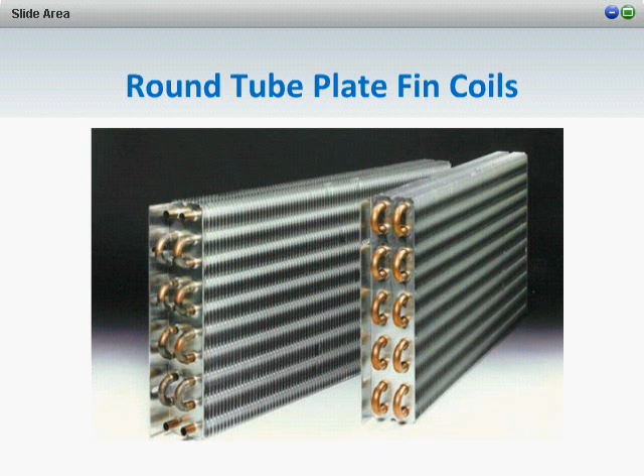The type of coils we're going to talk about today are round copper tube plate fin coils, used in a number of applications covering residential, commercial, and industrial settings. These coils can be condensers, evaporators, water heating coils, and a number of other heat exchanger uses. Round tube plate fin coils have been around for over 100 years, and there are good reasons why they are still in use today. But as we're going to see, they are being successfully modified to fit modern demands.

Many of us are already familiar with the increasing requirements for energy efficiency and the push to use refrigerants that are less damaging to our atmosphere. In an effort to lower costs, many design engineers are also under demands for smaller, more compact systems that save on materials and refrigerants. So over the next 60 minutes, we're going to discuss these demands for efficiency and cost savings, and look at how smaller diameter MicroGroove copper tubing can help meet these demands with minimal investment or change to our well-established manufacturing practices.

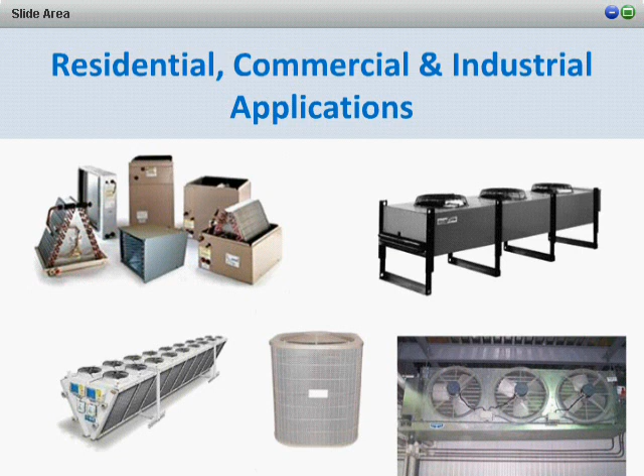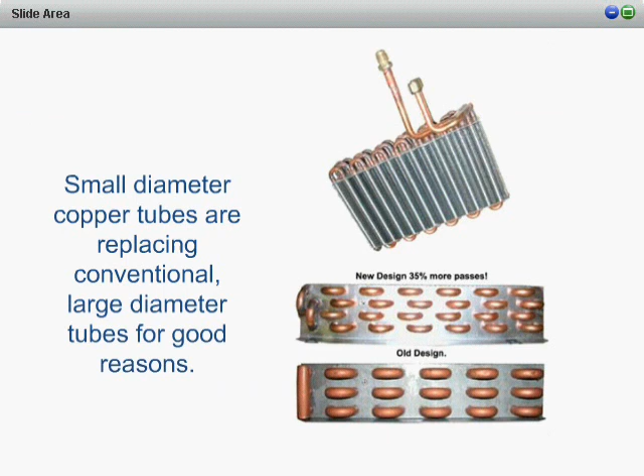Specifically, we're going to show how reducing the diameter of copper tubes can improve heat transfer, resulting in more energy efficient, smaller, and lighter coils, bringing about all of these benefits to the manufacturers and distributors of air conditioning and refrigeration systems.

Keep in mind that each of these benefits is not only associated with meeting energy and refrigerant regulations, but each benefit also means cost reductions or cost efficiencies that help all of us in this increasingly competitive market.

The standard round tube plate fin coil has been in use for over 100 years. In the 1980s, tubes with internal grooves and enhancements were developed, and because these internal modifications were found to have such a big impact on efficiency, they quickly became common in the market. The name MicroGroove today refers to these internal enhancements. But MicroGroove is a newer name, and it also means smaller diameter tubes.

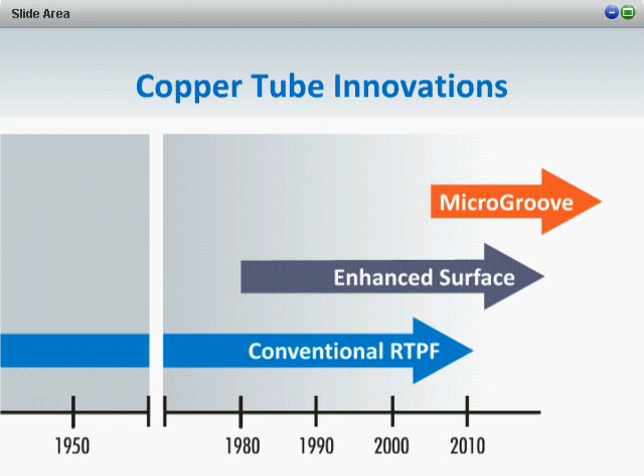Over the past 10 years, we have seen a trend toward internally enhanced, smaller diameter tubes, and on this timeline we noted that coils with MicroGroove tubes have been in commercial use since about 2005. And we know that all of these OEM manufacturers are currently producing systems with small diameter MicroGroove tubes.

There are a number of factors behind the move towards small diameter tubes, and they range from government mandates on energy efficiency, such as increased SEER ratings, to the phasing out of R22 refrigerant and higher pressures that are associated with replacements for R22. R22 replacements include 410A, which is currently being used in residential air conditioning systems. The coefficient of performance, or the COP, is another rating that design engineers are paying more attention to, and the drive to increase COPs is yet another factor behind trends towards smaller diameter tubes.

About 20 years ago, government regulations became a larger factor in the design of air conditioning and refrigeration equipment when the Montreal Protocol took effect, and that happened in January of 1989. Since then, that's undergone 7 revisions. The Montreal Protocol mandated a phase-out plan for CFCs, which are chlorofluorocarbon refrigerants, and they mandated that phase-out by 1995.

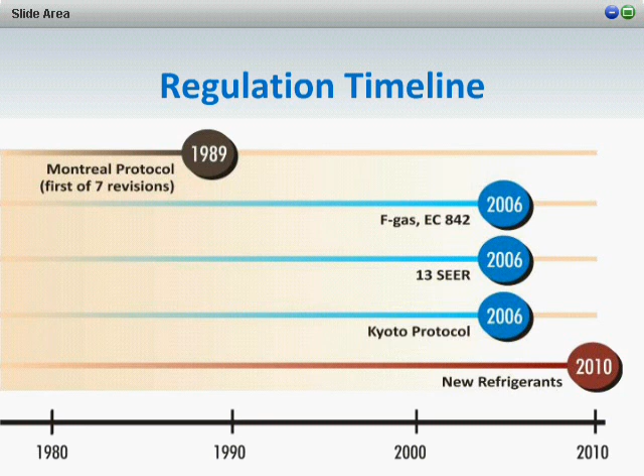The Kyoto protocol was adopted in December of 1997, and that went into effect in 2005. And the Kyoto protocol adds to the phase-out of CFC covered by the Montreal Protocol, and it focuses on greenhouse gases and HFCs. To quickly summarize this slide, government mandates that are related to energy efficiency and refrigerant use have pushed air conditioning and refrigeration manufacturers toward new coil designs that have to be more efficient, and they have to handle higher pressures.

Before we get into the technology of refrigeration and air conditioning coils and the technical reasons behind the trend to smaller diameter tubes, we want to emphasize just how complicated this subject is. We have refrigerant that's moving through coils, and as it does, the refrigerant changes phase from vapor to liquid, or vice versa. In the process, we have heat being transferred from the refrigerant through the tubes to the fins and ultimately into the air. And finally, we have the air that's moving across the fins and the heat that's being dissipated into that air. In all of these segments, we have dynamic processes occurring.

So the math behind the design of a coil can be quite lengthy and complicated. So for the purposes of this discussion, we're going to concentrate on technical concepts, and we'll use images to make our points. We plan to avoid any heavy math today, but we could go into that level of detail in a separate meeting where we would have sufficient time to do so.

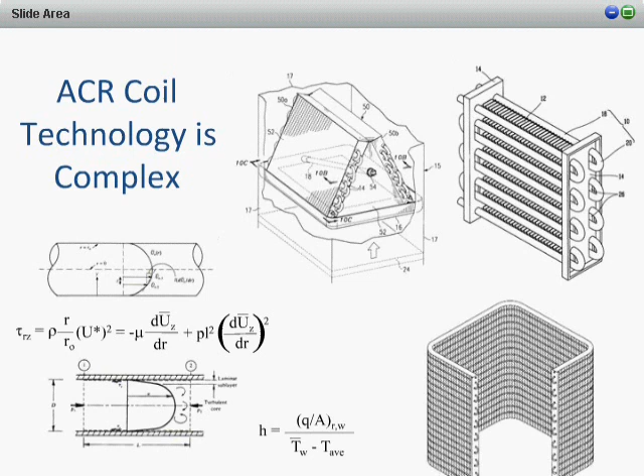So let's review the path that heat takes and the mechanisms involved as it moves from the refrigerant inside of a tube, through the tube wall, into the fins, and finally into the air.

The heat that has been transferred into the fins is eventually transferred into the air by convection. So we see areas where both convection and conduction are the mechanisms at work transferring heat.

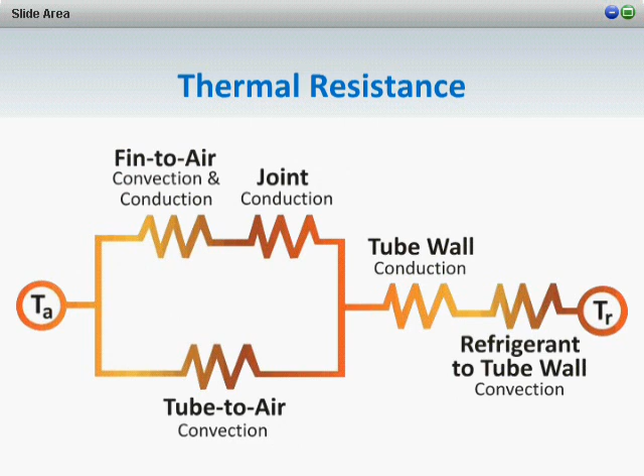Now let's take a close look at exactly what happens to the refrigerant flowing through the tubes, because that's where all of the heat transfer begins.

Whenever fluid moves through a tube, the fluid closest to the tube wall behaves differently than the fluid in the center. The fluid next to the tube wall sets up a boundary layer where heat transfer becomes more difficult. This applies to the hydraulic motion of fluid as well as the way heat moves from the center of the tube to the tube wall.

So heat transfer engineers refer to both hydraulic and thermal boundary layers. To simplify, the fluid closest to the tube tends to move slower than the fluid in the center. Even in turbulent flow, a laminar sublayer forms, and heat moves slower through these boundary layers than it does in the fast-moving fluid toward the center of the tube.

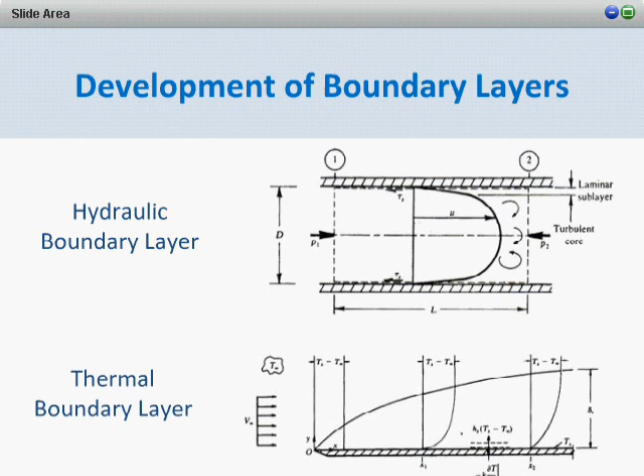Boundary layers act as an insulator, and they interfere with the heat transfer that we want. The internal enhancements in MicroGroove tubes—the grooves and proprietary patterns that tube manufacturers put on the inside tube wall—reduce this boundary layer and increase heat transfer through the tube wall.

Here we can see the boundary layer in a smooth tube develop, and it does not dissipate or go away. But in a tube with MicroGroove enhancements, you can see that the boundary layer begins to develop, but it breaks down as it moves over the grooves.

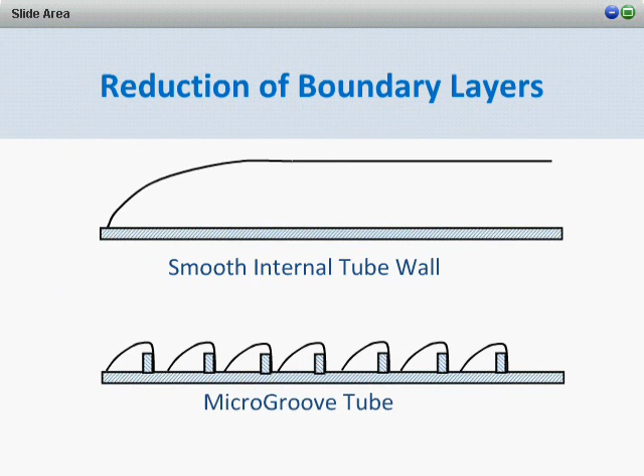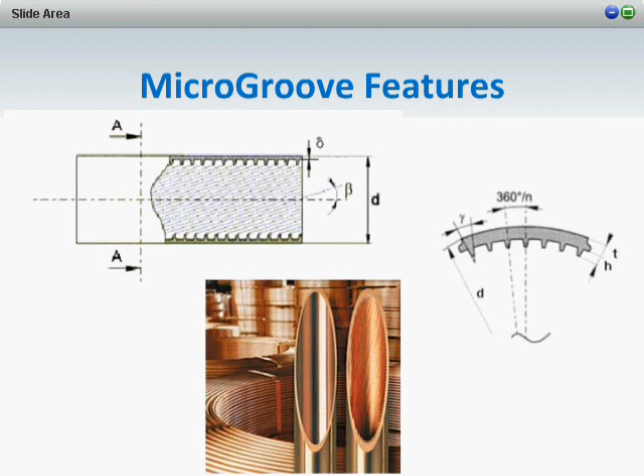The exact configuration of internal grooves and patterns is based on a long history of technical development and design, and it's backed up by both experimental and field performance data. The data clearly shows significant advantages to MicroGroove tubes.

The additional mixing of the refrigerant that occurs inside the tube because of these grooves increases the amount of refrigerant that comes in contact with the tube wall. The positive effect on heat transfer from these internal enhancements has been known for a long time, and it's been applied commercially for over 20 years.

And when combined with small diameter tubes, we have even more advantages that we want to look closer at. But before we do, let's look for just a minute at how air flows through a round tube coil.

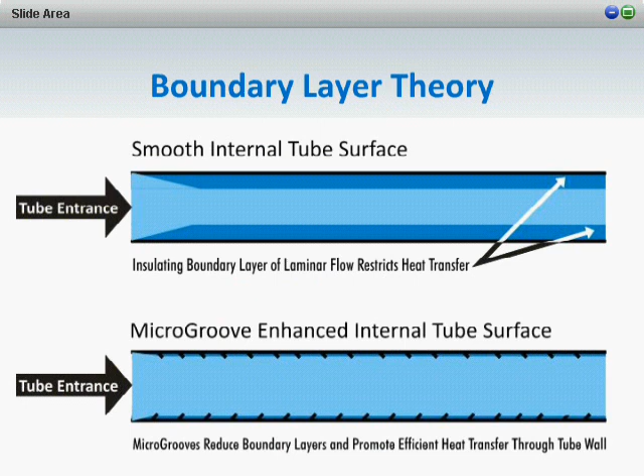Air must flow around the tubes as it passes through a coil, and as it does, the airstream is broken up and heat is transferred into the air. The number of tubes and their location will have an impact on the air pressure that is lost going through the coil.

Air forms the same type of boundary layers as refrigerant does, and in many respects it can be dealt with the same as any fluid. Just as we saw with microgrooves inside the tubes, outside, the tubes break up any boundary layers that the air tends to form as it flows through the coil.

The more tubes we use, the more we break up the boundary layer on the air side, and more heat transfer will result. But in many cases, more tubes means a higher airside pressure drop. So there's a balance at some point where a coil uses an optimal amount of air to achieve the heat transfer that the system requires.

Remember also that heat is being dissipated by the fins, and the fins have slots or louvers, again, to break up boundary layers and improve heat transfer.

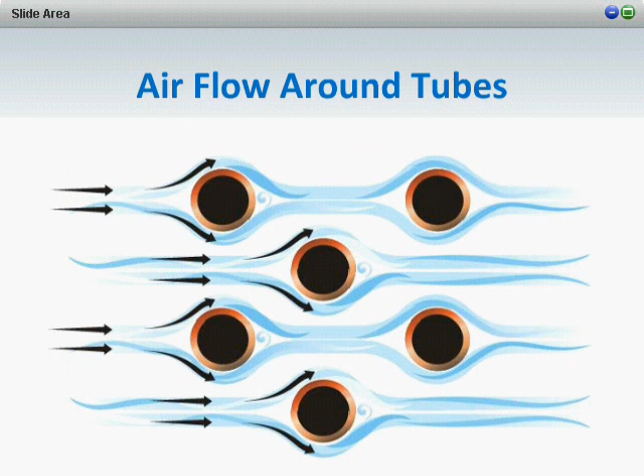Now let's discuss the geometry related to a reduction of tube diameter. And while we do, keep in mind the fluid dynamics that we just looked at and the advantages of microgrooves.

When we compare tubes of different diameters, the first thing we might notice is that it will take several smaller diameter tubes to equal the surface area of a larger diameter tube. At first glance we might think this is a disadvantage, but we actually have some important benefits here, a big one being an increase in the surface area to volume ratio, which equates to more heat transfer.

With this increase in heat transfer, we don't need to match the volume or surface area of the larger tube to get the same amount of cooling.

Another benefit we haven't mentioned yet is that in a smaller diameter tube, we can hold the same pressure as a larger diameter tube, but we can do it with thinner walls. So when we reduce tube diameters, we can actually reduce the weight of the materials being used, and that in turn reduces costs.

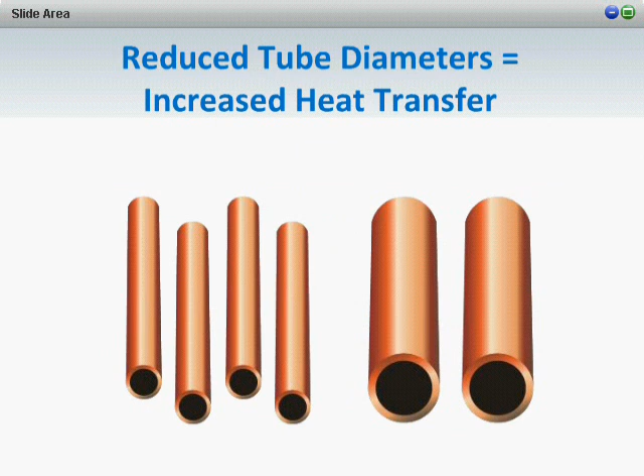As we continue to reduce tube diameters, we continue to gain surface area in relation to the amount of refrigerant that we have in the tube, and we can continue to reduce tube wall thicknesses while still meeting the same pressure criteria as the larger tubes.

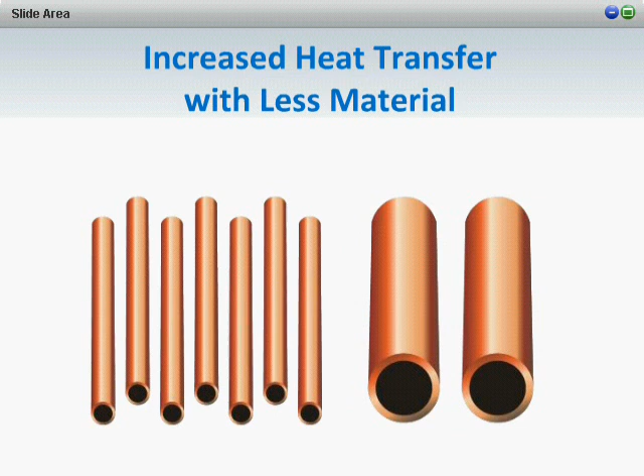Or, looking at it from another angle, we can handle higher pressures in a smaller diameter tube with the same tube wall thickness. The bottom line is that we can do a whole lot more with considerably less material.

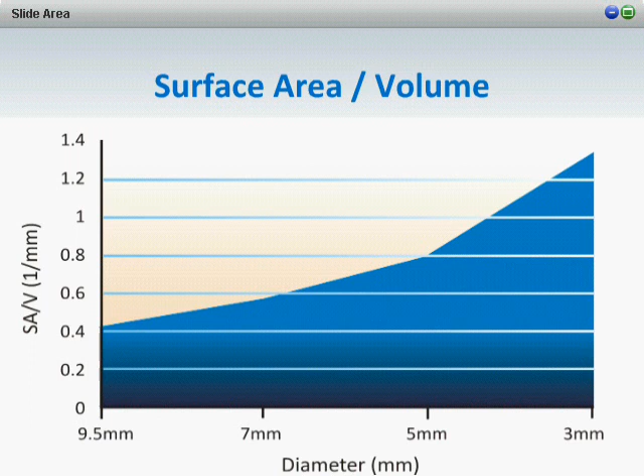Now we want to start talking about what happens to the entire coil when we substitute smaller diameter tubes. For the person designing coils, there are a number of factors to consider, and all of these will impact things buyers care about, such as how big the coils are, how much energy they use, and how much they cost. There are options when designing coils, and we want to look closer at these options to see the effects on performance.

So let's adjust these parameters: first, the total length of the tubes; second, the amount of surface area; and third, the volume of refrigerant.

The effects we're interested in when these parameters change are: number one, the overall performance of the coil as measured by the amount of heat transferred; number two, the weight of the coil, because that correlates directly with material cost; and number three, the heat transfer coefficient or coefficients, recalling the thermal resistances from the earlier slide.

For this discussion, we will reduce the diameter of the tubes. Without getting into a lot of numbers, let's take a look at a chart that shows the effect of changes to these parameters.

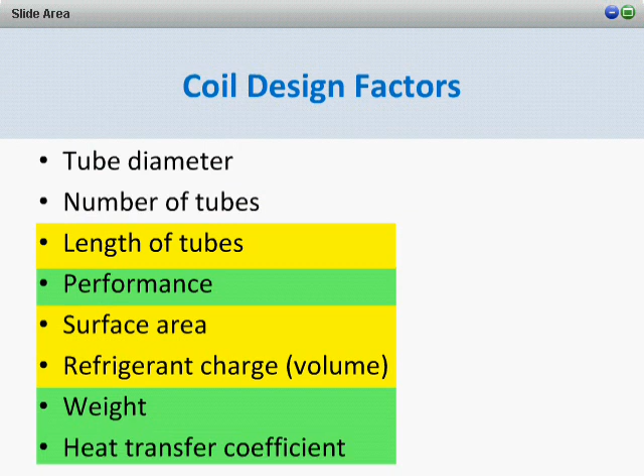This chart shows different scenarios, and in each case we're reducing the diameter of the tubes. In each scenario, you can see that one of the parameters is held constant.

Let's look first at what happens when we hold the total length of tubes constant but reduce the tube diameter. What we're talking about here is not the length of each individual tube, but if we add up the lengths of all the tubes, we get a total tube length—that's what we're referring to.

If we match the total tube length, we see a decrease in surface area, a decrease in volume and weight. The heat transfer coefficient increases, but the drop in surface area is such that the system cannot match the original performance, so performance drops.

This would amount to considerable cost savings due to the low refrigerant charge and reduced materials, but depending on the application, that drop in performance would probably not be acceptable.

In the second column, the performance is held constant, but to achieve that, the total tube length was increased. We have considerably less surface area than the original coil, and also much less volume, less weight, and a higher heat transfer coefficient.

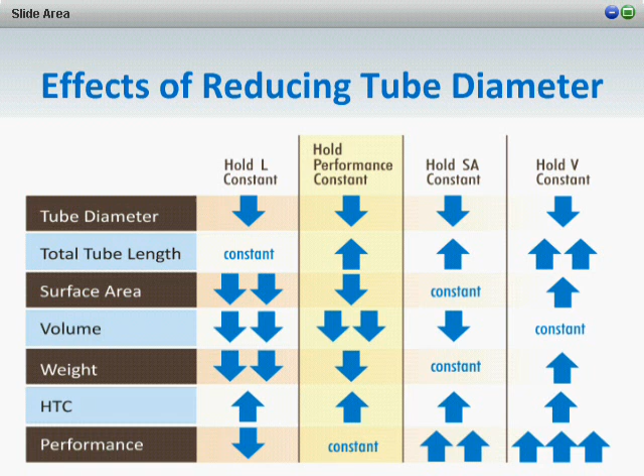Now that we've looked at the theory behind the benefits of microgrooves and small diameter tubes, let's remember again the factors driving our market right now. As design engineers grapple with these changes, they realize there are benefits of smaller diameter microgroove tubes that have not yet been fully exploited, and these benefits could solve a lot of the problems they were dealing with.

Specifically, the increase in surface area to volume ratio from microgroove tubes had a big impact on the heat transfer coefficient. Plus, smaller diameter tubes could withstand higher pressures with thinner tube walls.

And this gives the people that design coils some options. First of all, coils can be designed to take up the same amount of room but have considerably higher performance and handle higher pressures. This is important if pressures produced by the compressor have gone up to meet new SEER ratings. Or another option is to design coils that take up less room and still have higher performance than coils with larger diameter conventional tubes.

Coils can be designed with smaller diameter microgrooves to match the performance of an existing coil, but take up much less space, and due to thinner tube walls, material costs and refrigerant charge would be lower. Or coils can be designed with a lower airside pressure drop. All of these options are valuable, and depending on the goals of the project, all options have the potential to reduce costs.

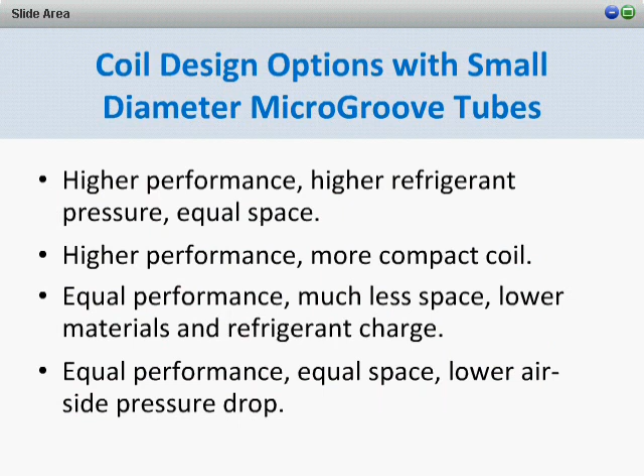There are yet more options available, but this gives you an idea of the design flexibility that results from microgroove tubes.

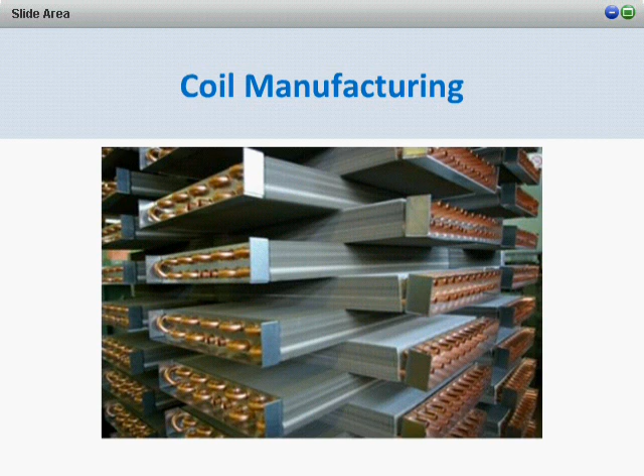Now let's talk about manufacturing coils with smaller diameter microgroove tubes. Shown as simply as we can, a typical coil is made of tubes and a series of flat plates.

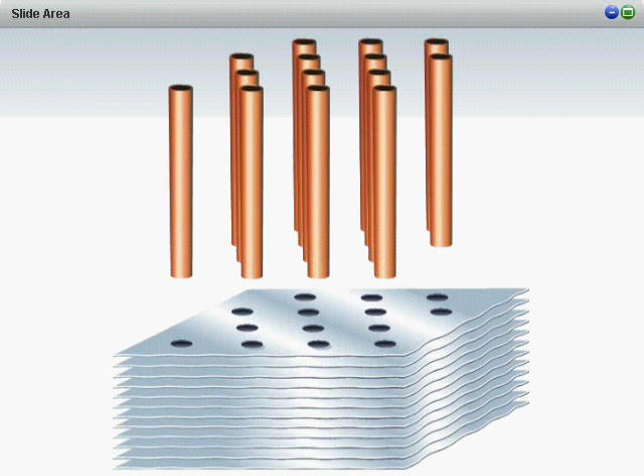The tubes are inserted through the plate fins, and fin spacing is maintained by the size of the collar that's formed around the holes for the tubes. Fins can be stacked prior to the placement of the tubes, and the collars around the tube holes will hold the fins at equal spacing.

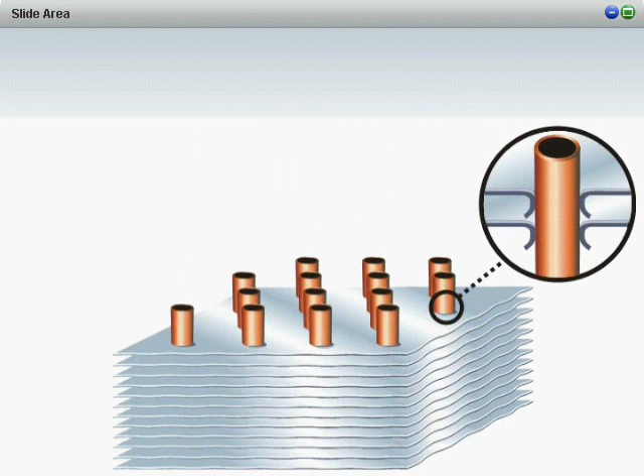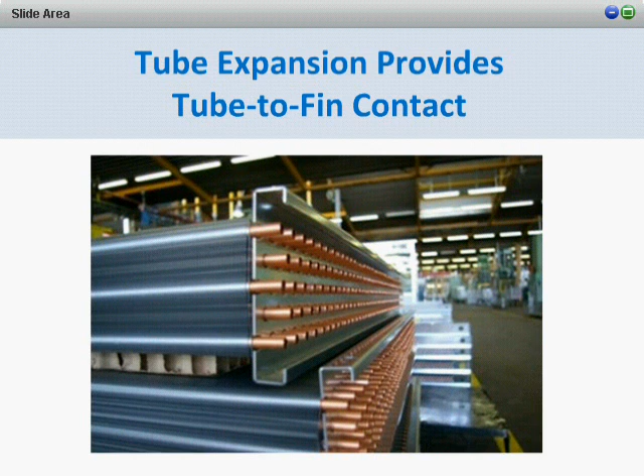The tubes are then expanded in diameter, and this binds them to the fins mechanically. This expansion of the tubes produces a contact between the tube and the fin, which is critical to the transfer of heat. In this photo, you can also see the louvers in the fins.

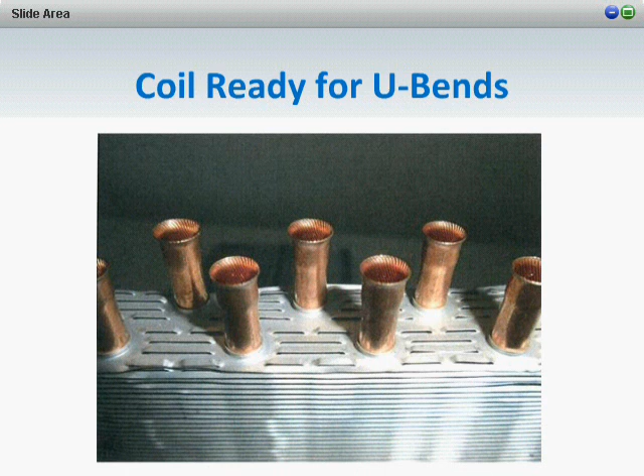Remembering our discussion on boundary layers, these louvers increase heat transfer by breaking up the air and eliminating the formation of boundary layers. You'll also notice that the tube ends are flared for U-bend fittings.

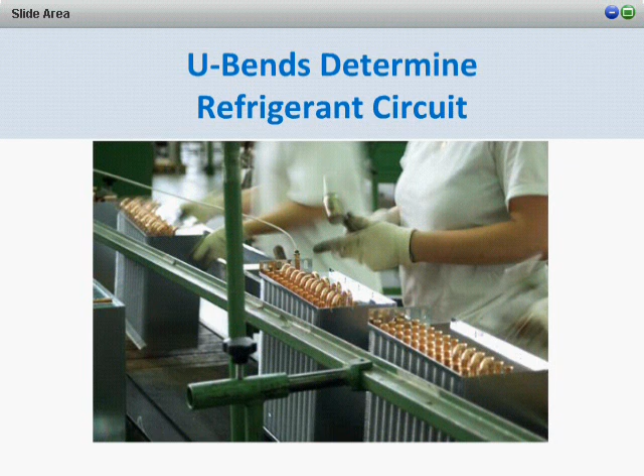U-shaped fittings are brazed onto the tube ends, and this determines the exact circuit that the refrigerant will travel through the coil. The brazing material is often supplied as a solid ring that slips onto the joint during assembly, and that ensures that a consistent amount of material is used in each joint. This is a well-established process, it's very reproducible, and it's very robust.

This method of manufacturing coils continues to set the industry standard for corrosion resistance and reliable service life. Since this process remains largely unchanged for small diameter microgroove tubes, engineers and technicians throughout the industry are familiar with the practices and also the costs associated with it.

So now let's take a look at actual situations where small diameter microgroove tubes were used and the resulting data that was generated.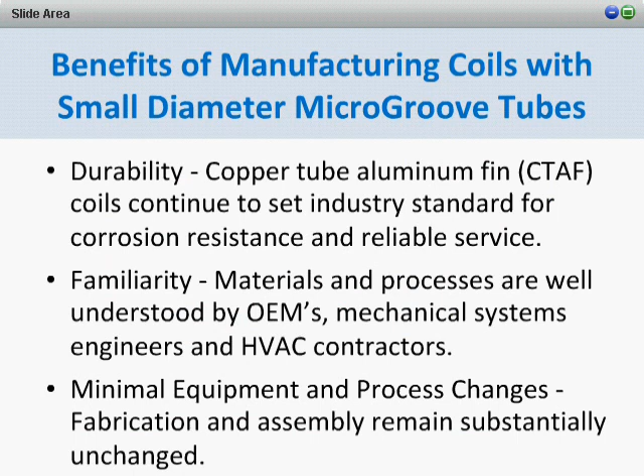In China, a small diameter copper tube research consortium was formed, and their results have served as a foundation for the development of residential air conditioning products that are more economical and use less material than traditional technology with conventional tubes. Wenson Zheng, Frank Gao, and Kerry Song, all from the International Copper Association's Shanghai office, co-authored 4 research papers on small diameter copper tubes, and they did that in cooperation with 2 Chinese universities.

They collaborated with the School of Energy and Power Engineering at Xi'an Jiaotong University on heat exchanger design projects. And they collaborated with the Institute of Refrigeration and Cryogenics at Shanghai Jiaotong University on the condensation of refrigerant oil mixtures in small diameter tubes.

In addition to research papers and projects at universities, air conditioning and refrigeration OEMs recently published 3 papers on small diameter copper tubes. Researchers from Chigo Air Conditioning reported on the performance of small diameter copper tubes in an evaporator for residential air conditioners. Researchers from Midea Refrigeration Appliances reported on small diameter inner grooved copper tubes in a split air conditioning system. And researchers from LU-VE in Italy presented geometry for the next generation of condensers with an ultra-low refrigerant charge. All of this information can be found at our MicroGroove.net website.

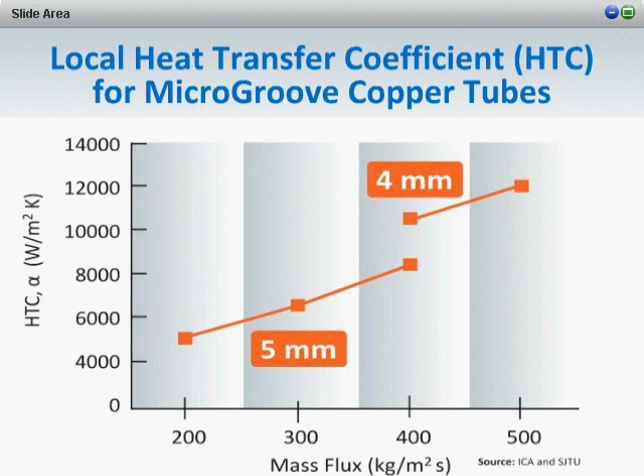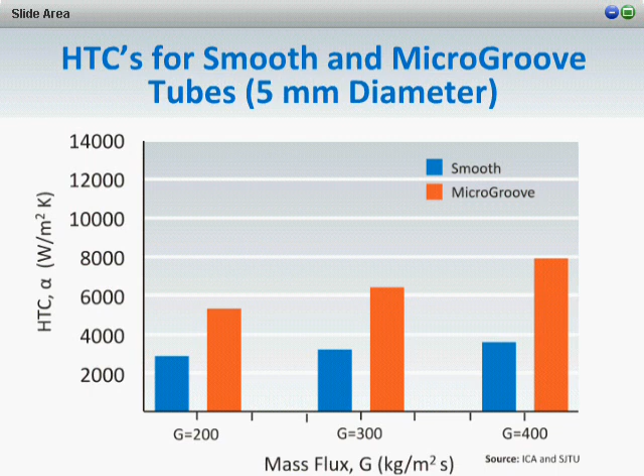Pressure losses can be easily reduced with an increased number of branches. In fact, if the number of branches is increased, the tube length per branch can be decreased, and that provides extra options to the heat transfer engineer.

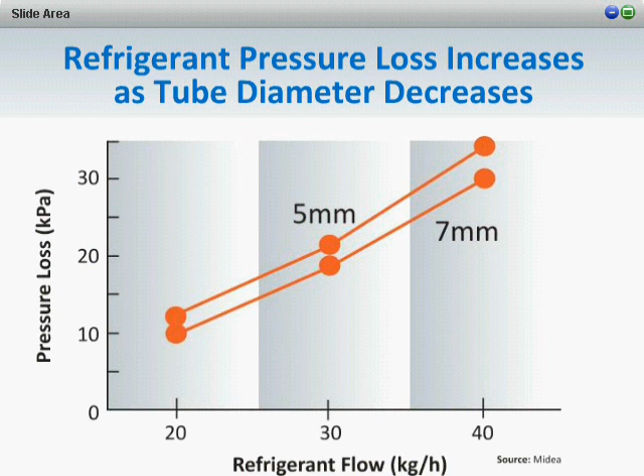Comparisons are often made between round copper tubes and aluminum microchannel tubes. Be careful that the copper tubes in the comparison you're looking at are microgroove. As you've already seen, just comparing copper tubes with smooth internal surfaces to enhanced internal surfaces shows big effects. Comparing conventional, larger diameter, smooth copper tubes to aluminum microchannel tubes will also show favorable results for microchannel. However, when the comparison is made to smaller diameter copper microgroove tubes, the copper tube is not only competitive, but it's often superior.

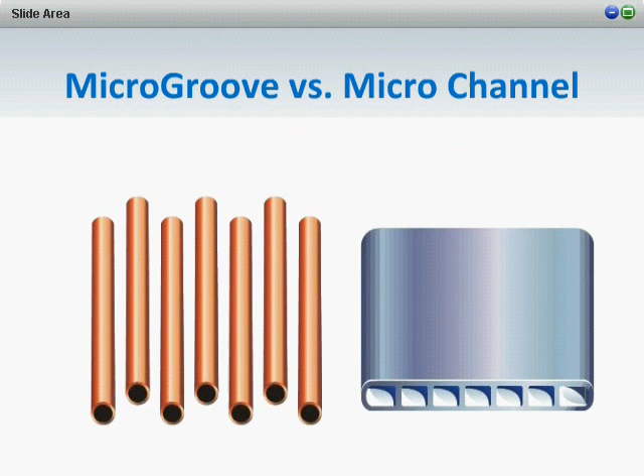Comparison studies often cite a high airside pressure drop as a disadvantage for copper tubes. However, we must remember that both the tube geometry and the fin design are responsible for the airside pressure drop. With copper tubes, there are a number of options, such as the number of tubes, how the tubes are arranged, or the tube geometry, and all the parameters that go into the fins, such as fin pitch, louvers, louver angles, etc. Microchannel tubes allow only one path for air, so the only parameters left to deal with airflow and airside pressure drop are those related to fin design.

On the refrigerant side, remember that the circuitry of copper microgroove tubes can be modified to adjust refrigerant pressure drops. A big advantage for microgroove tubes is the lower refrigerant charge. Aluminum microchannel tubes are all joined at a manifold that can take a considerable amount of refrigerant to fill.

Let's take a look at a report by an Italian company named LU-VE that was presented last year at a workshop on refrigerant charge reduction, at a conference in Stockholm, Sweden.

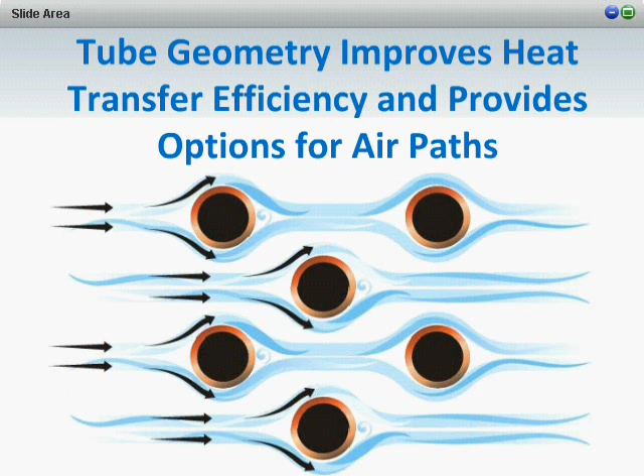As I mentioned, their existing coil had 9.52mm tubes, and in the trial designs, they used aluminum multi-channel tubes and 5mm microgroove tubes.

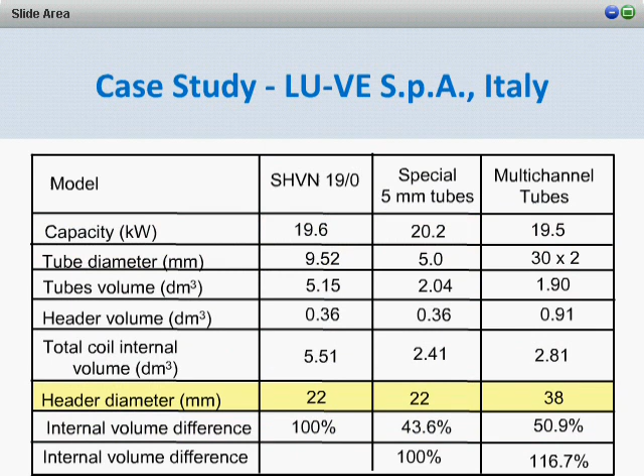So in conclusion, I'd like to review these basic benefits related to small diameter copper microgroove tubes.

Small diameter microgroove tubes allow for energy efficient designs. They allow manufacturers to use less material and less refrigerant, and these are proven, durable products with a history of success behind them. Small diameter microgroove tubes allow engineers the flexibility to design for a wide variety of operating conditions.

This is a manufacturing process that's proven, economical, and robust, and is familiar to the entire industry. And finally, this process is supported by a supply chain that's very well established with manufacturing and distribution centers worldwide.